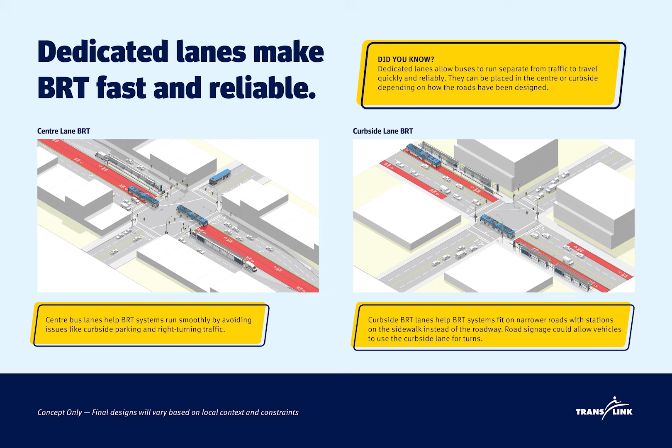Stations are an essential part of delivering a comfortable and rapid BRT service. They offer a safe, welcoming place to wait and include features that make boarding more efficient and accessible. BRT stations will be adaptable to suit each location along the corridor. They may be smaller or larger depending on the local context, with a range of features and amenities, but all are designed to be easily recognizable and provide a comfortable experience for customers.

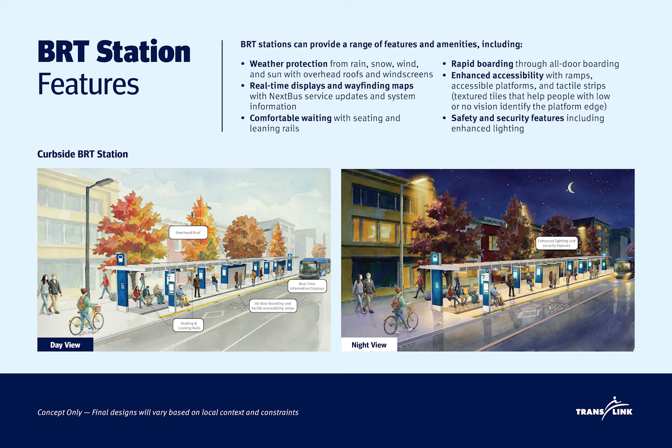BRT stations can provide a range of features and amenities, including weather protection from rain, snow, wind, and sun with overhead roofs and windscreens. Real-time displays and wayfinding maps with next bus service updates and system information. Comfortable waiting with seating and leaning rails. Rapid boarding through all-door boarding. Enhanced accessibility with ramps, accessible platforms, and tactile strips, which are textured tiles that help people with low or no vision identify the platform edge. Safety and security features, including enhanced lighting.

Langley-Haney Place BRT will deliver 22 kilometers of rapid transit service with 13 stations, serving key destinations like Haney Place, Ridge Meadows Hospital, Carvolth Exchange, Langley Events Centre, and Willowbrook Shopping Centre. It will provide faster travel times to get you where you need to go with speed similar to the Canada Line with dedicated bus lanes along most of the corridor. A fast, frequent, and reliable rapid transit connection for approximately 13,000 daily riders in 2035.

BRT can reduce bus travel time by approximately 40% during afternoon peak hours, with an end-to-end journey taking about 40 minutes. BRT travel time will be similar to driving. Connections to the R3 Lougheed Highway RapidBus, services at Carvolth Exchange, and the future Surrey-Langley SkyTrain at Willowbrook Station. With frequency you can trust, BRT is expected to arrive every 10 minutes during peak times, more than double the frequency compared to local services today.

BRT bus lanes will improve reliability, reducing delays from traffic that cause buses to show up late. And space for you and everyone on the road with frequent service and high-capacity buses that mean more room and less crowding on board. Traffic impacts are being assessed to ensure the road works for everyone: drivers, transit riders, pedestrians, and cyclists, while supporting emergency services, goods movement, and access to local businesses.

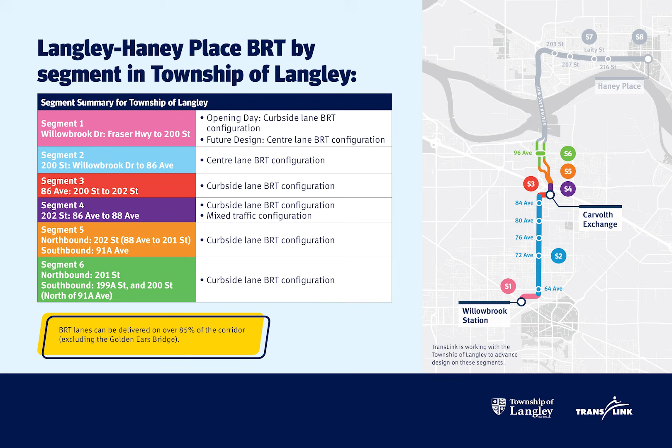For our design process, Langley-Haney Place BRT has been divided into 8 segments. There are 6 segments within the Township of Langley, and the remaining 2 are in Maple Ridge. Each segment represents a different set of existing road conditions, along with configurations we're exploring to enable the delivery of BRT. BRT lanes can be delivered on over 85% of the corridor, excluding the Golden Ears Bridge. Let's explore these segments together.

Segment 1, Willowbrook Drive, Fraser Highway to 200 Street. Today, a typical section of this segment includes 2 traffic lanes in each direction, with left turns at intersections and a raised center median. We're considering a curbside lane BRT configuration on this segment on opening day, where buses run in the curbside lane, providing faster, more reliable service than in mixed traffic. And one traffic lane is converted for BRT and local buses in each direction, with center median left turn lanes to remain.

We're considering a center lane BRT configuration for the future, timed with a redevelopment of the area where buses can run in the center lane, with 2 traffic lanes in each direction, which will require road widening, and left turn lanes at signalized intersections.

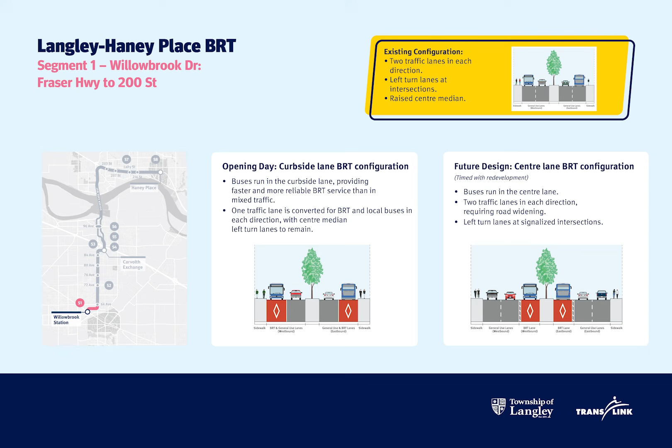Segment 2, 200 Street, Willowbrook Drive to 86A Avenue. Today, a typical section of this segment includes 2 to 4 traffic lanes in each direction, left turn lanes at signalized intersections, raised center median in some areas, access to Langley Event Center, Latimer Village, and nearby businesses. We're considering a center lane BRT configuration on this segment where buses run in the center lane, maintaining 2 to 4 traffic lanes in each direction depending on the area. In some areas, a reduction in lanes may be required.

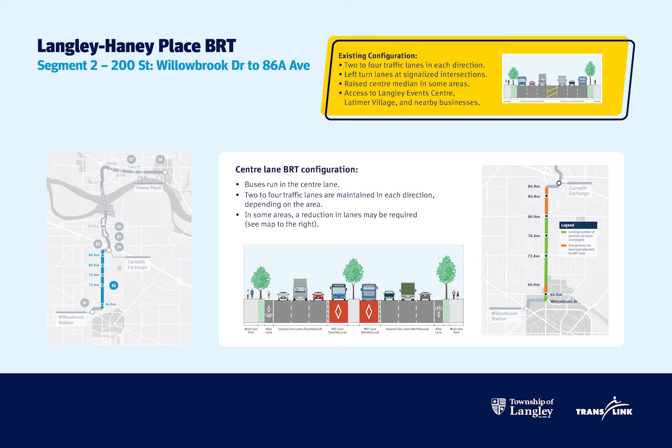Segment 3, 86th Avenue, 200 Street to 202 Street. Today, a typical section has 1 travel lane in each direction. This segment is scheduled for widening in 2026 by the Township of Langley. We're considering a curbside lane BRT configuration, maintaining 1 traffic lane in each direction, matching the planned road widening by the township.

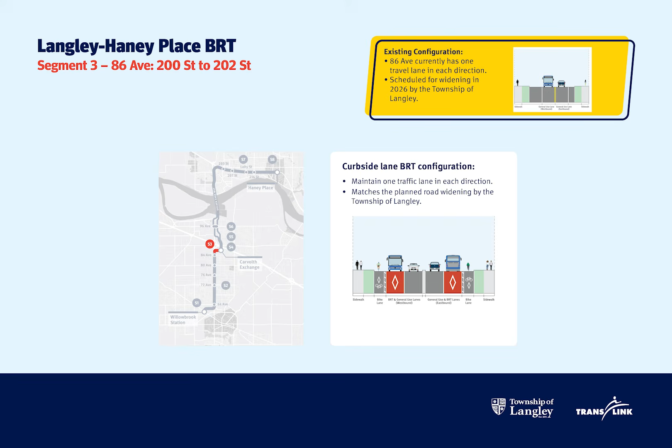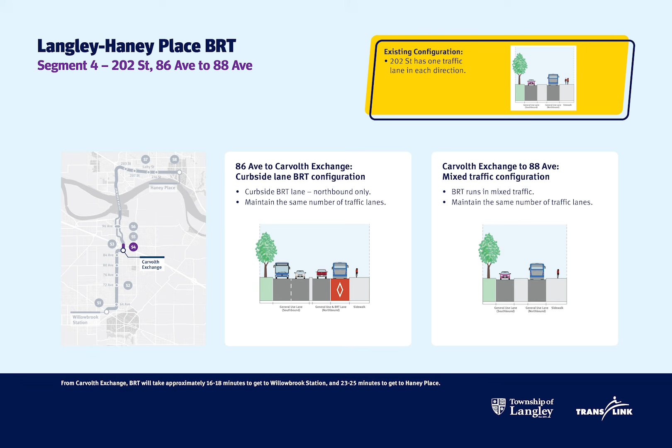Segment 4, 202 Street, 86th Avenue to 88th Avenue. Today, 202 Street has 1 traffic lane in each direction. From 86th Avenue to Carvolth Exchange, we're considering a curbside configuration, with a curbside BRT lane in the northbound direction only, while maintaining the same number of traffic lanes. From Carvolth Exchange to 88th Avenue, we're considering a mixed traffic configuration, where BRT runs in mixed traffic, while maintaining the same number of traffic lanes. From Carvolth Exchange, BRT will take approximately 16 to 18 minutes to get to Willowbrook Station and 23 to 25 minutes to get to Haney Place.

Segment 5, northbound on 202 Street, 88th Avenue to 201 Street, and southbound on 91A Avenue. Today, 202 Street has 2 traffic lanes in each direction, and 91A Avenue has 2 traffic lanes in each direction between 200 Street and 202 Street. Northbound on 202 Street, we're considering a 1-way curbside lane BRT configuration, where 1 northbound travel lane is converted for BRT, with other traffic lanes remaining the same. Southbound on 91A Avenue, we're considering a 1-way curbside lane BRT configuration, where 1 eastbound curbside lane is converted for BRT, with other traffic lanes remaining the same.

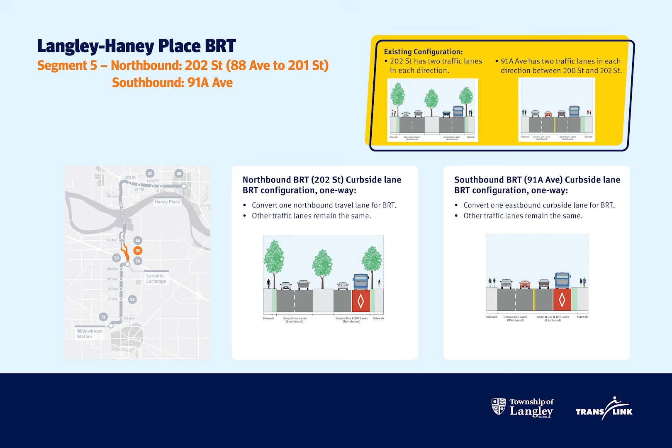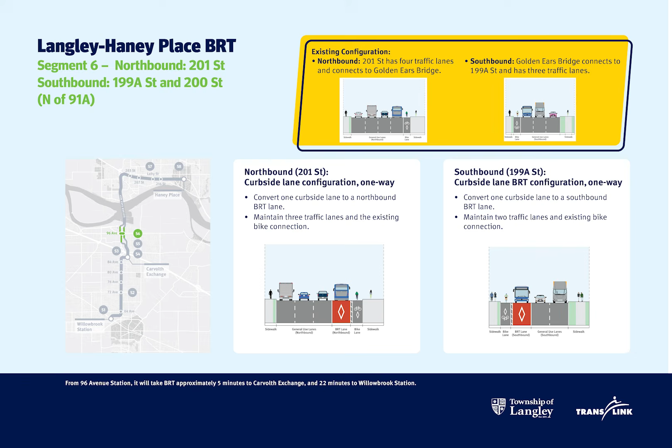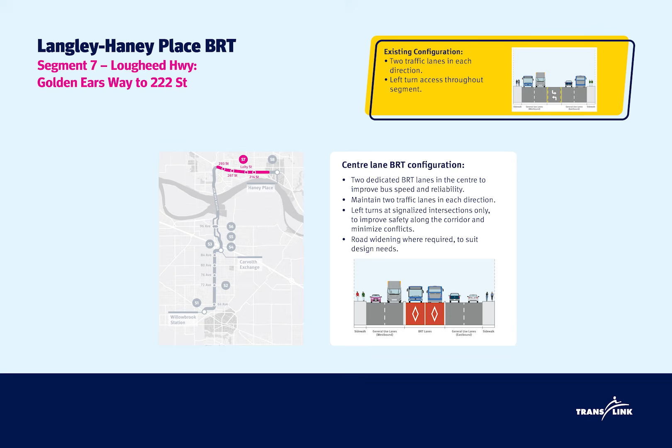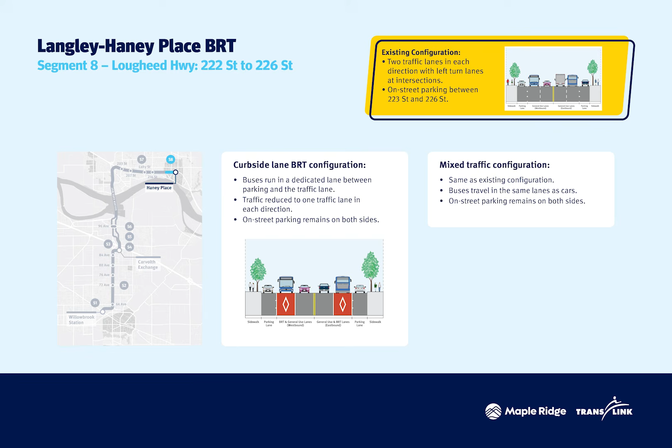Bus rapid transit will ensure our growing region will have access to fast, frequent, and reliable rapid transit.